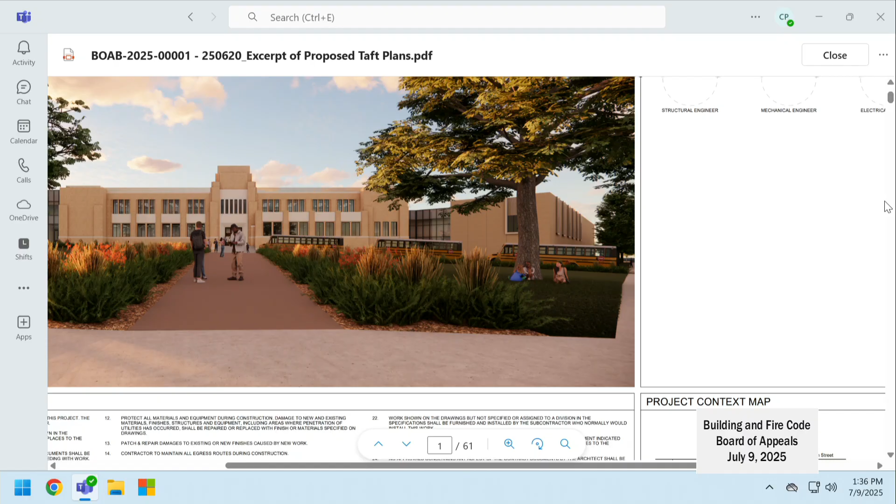So to kick things off, context on the Oklahoma City Public Schools bond. Back in November of 2022, there was a bond vote for $955 million in bond funds that would be used to improve or add to the facility capacity for Oklahoma City Public Schools. Of these, there were 14 signature projects, Taft Middle School being one. At that time, we had several public presentations which included the overall design of Taft Middle School, as well as the phasing or sequencing of the project that would help keep students active and educated on campus throughout the duration of construction.

We are in that process looking to modify the existing school building, which of course, built in 1931, does not have an ICC 500 compliant shelter on campus. But what we're looking to accomplish in the end is to provide a shelter that serves not just the Taft student population of today, but also the kind of maximum capacity staff and student population into the future of the campus.

During construction, as Scott mentioned, there is a handover period where, because of some of the sequencing, we have basically a period of one school year where there will be a new academic wing open that accommodates just the 7th and 8th grade students attending Taft Middle School today, down from the 6th, 7th, and 8th grade students who were on campus before construction. Those students will continue to shelter in the best available area of refuge, which is interior corridors and a basement that are existing as part of the campus or the original Taft Middle School structure, until the completion of Phase 2, which introduces the ICC 500 compliant shelter capable of housing 2,000 students and staff.

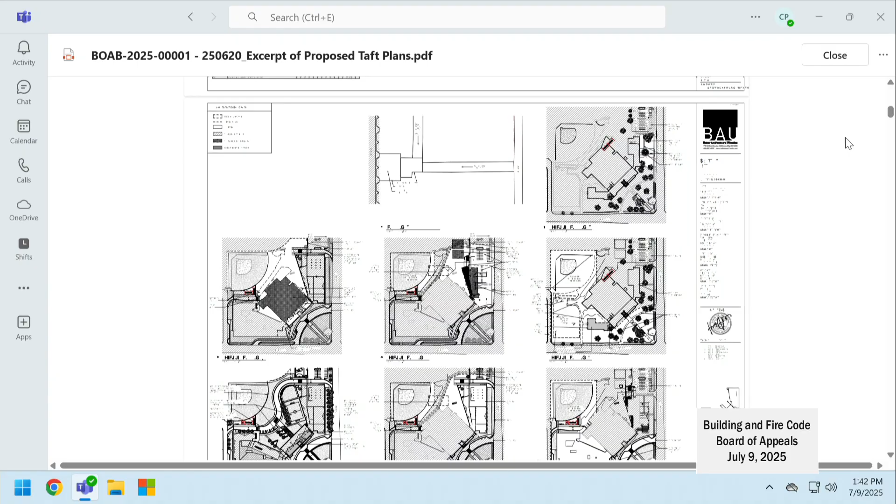Yes, that's correct. Go ahead and tell us about the phasing. So the phasing diagram's on screen, and there were additionally some renderings included with our application packet, showing the development of the site. I think if you scroll up, something's happened to our text here. In the upper right image is basically the campus as it exists today.

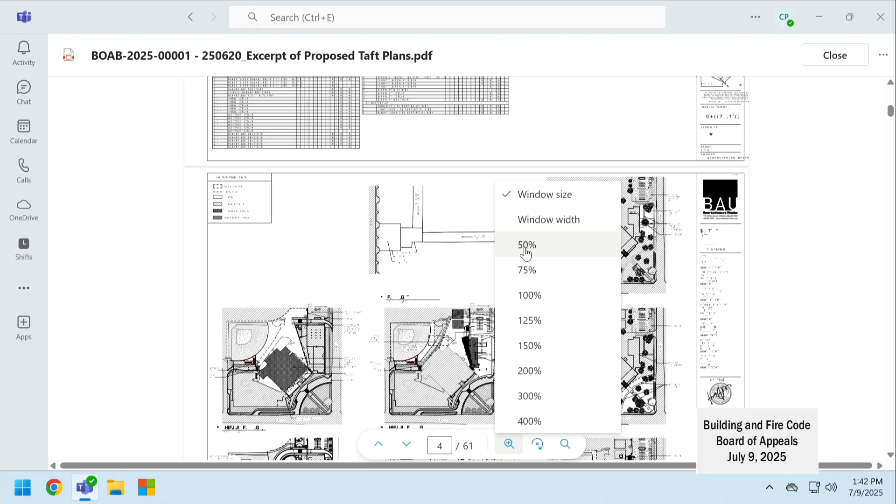That plan is the campus as it exists today, the existing Taft Middle School building. You can see a wing there extending to - and for orientation purposes, up is north on this drawing. To the west, we have a small wing that housed a total of 10 classrooms, not too many other functions housed in that wing. Then you have the central main body of the school, primarily single story with a 2-story front that houses their gym, auditorium, some other sports-related functions, some electives, a few classrooms. And then you have the north wing, which houses the bulk of the classroom facilities on campus, as well as the cafeteria and kitchen for the existing Taft Middle School students.

So really what we started with, our first phase looked at demolition of that west wing, so interrupting as few classrooms as possible and no core functions that couldn't be immediately replaced by moving students to another campus.

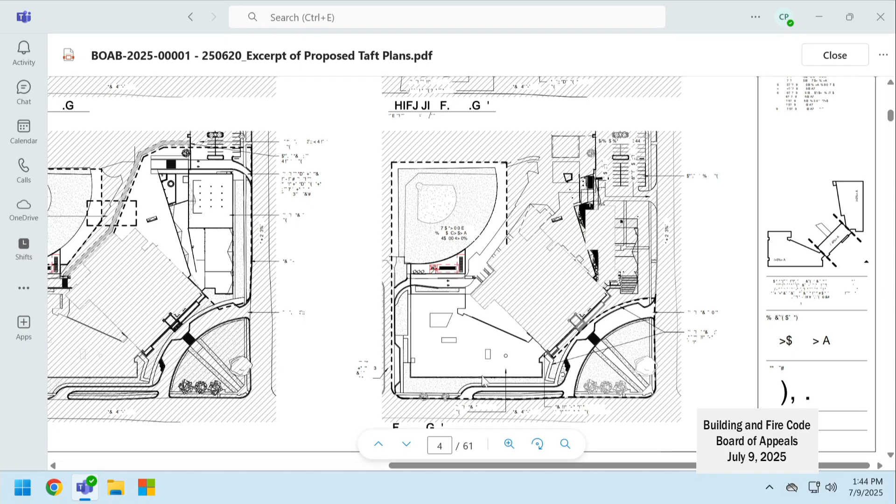We have the new proposed west wing, a much larger west wing with the intent that we provide both a cafeteria and kitchen, as well as the majority of the new classroom functions for Taft Middle School. I believe there are 36 new classrooms in just this wing alone, along with the kitchen and cafeteria, with the intent that we replace the 10 we tore down in phase one demolition.

Scrolling back up and to the left a little, we see phase two demolition takes that north wing. So again, we've lost 50% of what were existing classrooms, as well as the cafeteria and kitchen.

The plan just below shows the addition of a new north wing. That new north wing provides our ICC 500 shelter, which is the competition gym function for students. Just a portion of this wing is the actual shelter - it's the rectangle in the northeast corner of the new addition.

There are also functions like the new auditorium, a wrestling room, and a few other tributary functions that are part of Phase 2. Moving up and to the left, we see Phase 3 demolition, which takes the remainder of the back portion of that building, so the gym and auditorium just replaced in Phase 2 come down.

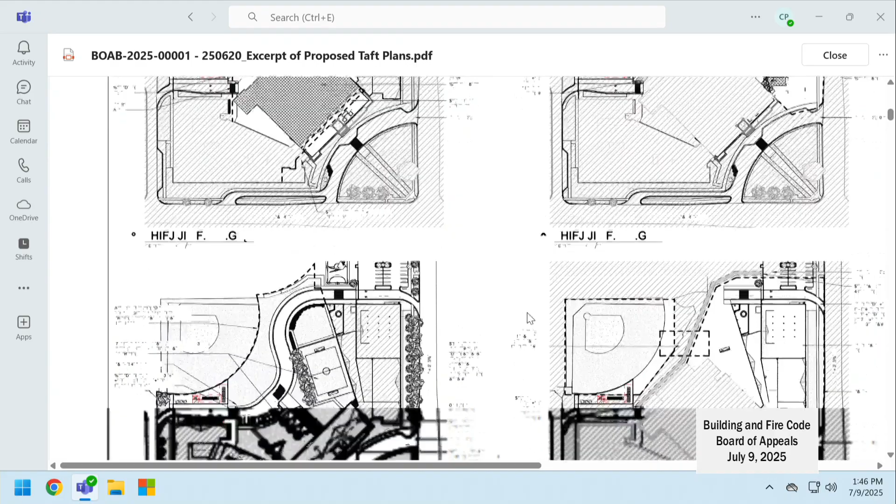Just below that we see a minor addition to the back of that existing building, so we can retain that historic public face facing the intersection of Northwest 23rd and May, and then provide those final classroom functions serving things like electives, arts, languages, and other special functions as our final move in Phase 3.

At this point, at the end of the project, 6th through 8th grade students would be able to be housed on one campus instead of also having the Linwood campus operational. So the intent would be that with that new shelter and new capacity open, we'd be able to consolidate all students back to the Taft proper campus.

Question: In Phase 1, where are your best available areas of refuge located? The best available areas of refuge remain in the existing building.

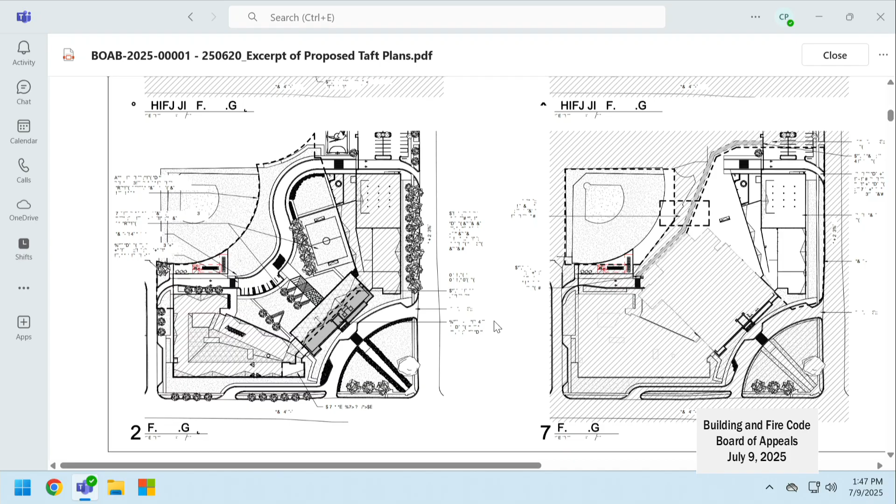Yeah, I think there's a PDF with an excerpt of existing Taft plans instead of the excerpt of proposed. Yeah, that existing file is perfect, thank you.

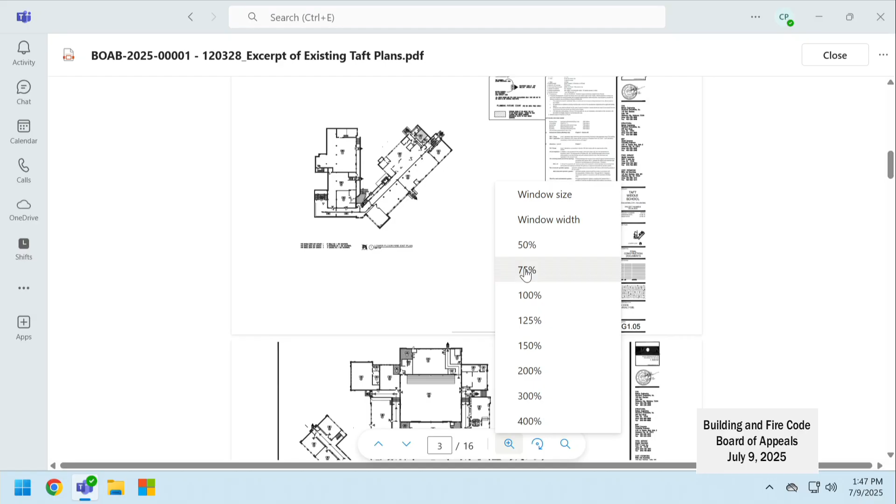So if we scroll down, these first couple pages should be good to illustrate this. This first plan is a partial lower level that exists on site. There's quite a bit of fall in the grade as we move from west to east, so that's where this partial lower floor plan comes in.

How close to the construction is it? This is directly adjoining the construction. The two are disconnected from one another at the moment for purposes of sealing off the school during construction. They will connect to the corridors of the existing building once Phase 1 is complete.

Scrolling down to the next sheet, here the plan has been rotated, so apologies for the orientation, motion sickness here. On the left side of the drawing is what was the west wing that comes down in the first phase of demolition. That west wing is where our new academic wing would tie into the existing and give access to those interior corridors, and then access as well via the stairs in the existing building down to the basement.

Okay, the basement - are you using the basement as your best available area of refuge? That is currently what the school uses as part of their best available area of refuge. The other part is made up by interior corridors on the ground floor, which is the upper plan on this sheet.

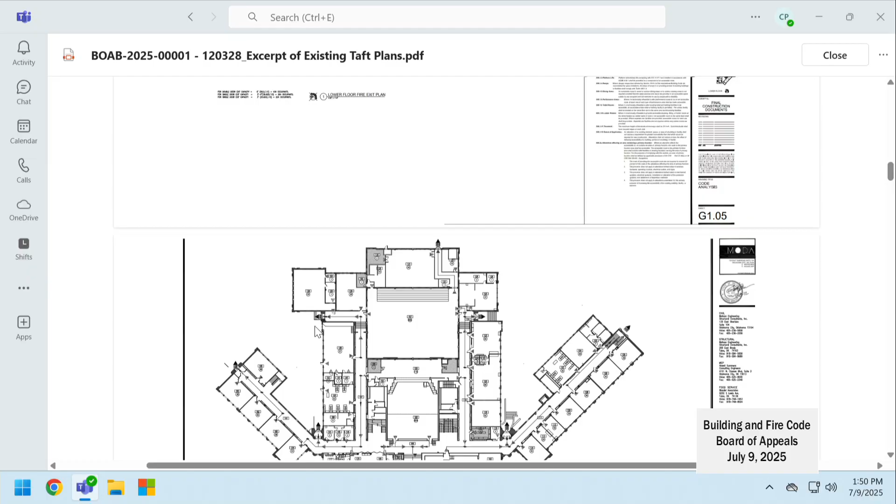Which one, where is the lower level fire exit plan? Next page above, yeah, that'll be our basement plan. Well, that's below, that is below street level. It is below grade on the left portion of this drawing. As you move to the right side of the sheet, we get closer and closer to the elevation of, like, May Ave. So it is down below grade by about 2 feet, but there are window sills at maybe chest height in the cafeteria space that look out towards May Avenue.

So I want to state for the board here as well, for the interim occupant load of 541 students, you said, right? Yes. The required square footage for shelter would come out to roughly 2,750 square feet. That sounds about right.

On your applicant statement you identify the 3 construction phases. The phase 2 identifies when you're going to put that storm shelter in, right? Yes, ma'am. So part of the package that we were given were the letter exchanges to the city back and forth. And in your letter you had mentioned there was a meeting on February 14th to discuss - was that when you guys discussed the phasing to try and see if everybody was on the same page? Kind of describe what happened at that meeting.

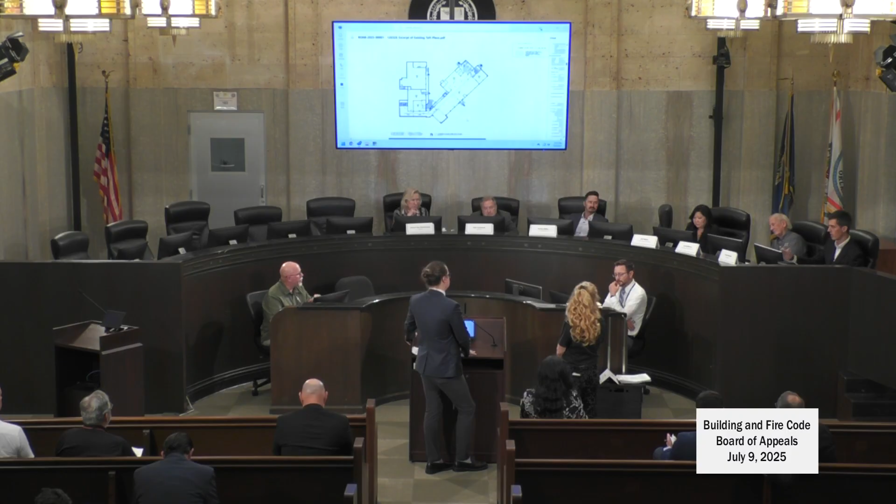How much hardened area, you mentioned some area of refuge, was proposed with phase 1? I understand it's not ICC 500, but do you have an approximation or a graphic that could show those portions? Yeah, we could provide one. I don't have that figure offhand, but it's a similar setup to the main body of this school where there are some exterior classrooms with windows for daylight and views and what have you. But the interior corridor spaces and things like restrooms could be used, yes.

I'm confused a little bit, I apologize, I want to back up to the basement area. Is that basement still utilized? It was. I was a student there, and I think they called it the Sooner Room or something, and it was a meeting place in the morning, a social place. Am I correct with that?

Does anybody else go to Taft? Just me?

Yeah, that area right there, yes, we do have classrooms right there. We had renovated through the years and also through the MAPS process. There was a big MAPS renovation at Taft as well a couple of years ago. So that area, those are regular instruction classrooms just outside that cafeteria area. It looks very different than probably way back then.

I'm confused why that would not be where you would want students to be for the tornado instead of a hallway that never works. Well, it's part of that area. So part of that area you're mentioning, it is what is included. What he mentioned that is excluded is kind of the cafeteria side, because that part is going to be demoed with phase 2. But the area that you're talking about, that dark basement, I understand that. We have renovated it and that is still available and it's going to be available through the whole construction.

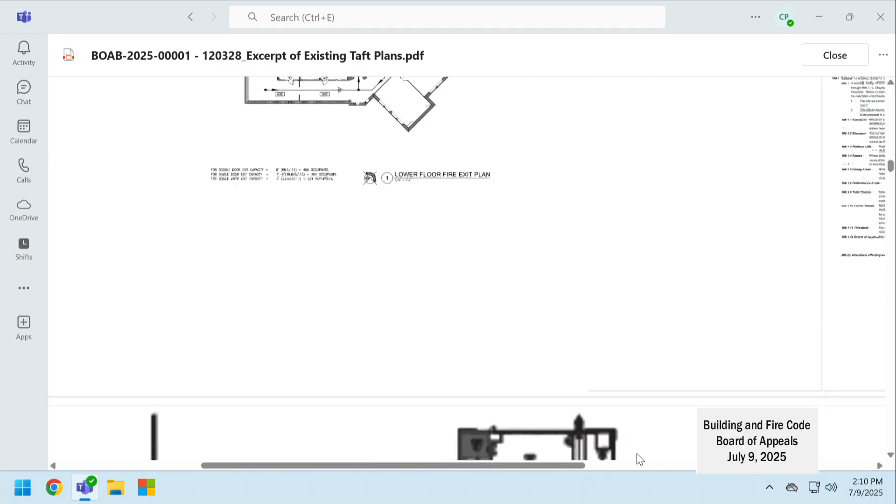I think the main reason for using that upper hallway as area of refuge space historically has been that additional grade of students that had been on site. So this was a 6th, 7th, and 8th grade campus pre-construction. So I think just capacity in the basement may not have been sufficient for 840 students, but it's something that could work for 2 grades.

Is there still a swimming pool there? No swimming pool.

Do they still make cinnamon rolls in the morning? No, I'm just kidding, I can't attest to the cinnamon rolls. Hey, you all don't know, you didn't go to school there. I'm trying to help you. Sounds like we should have.

So the roof structure of the Phase 3 portion, that's going to be demolished, behind the historic section. If you'll scroll down a little bit, Scott, that rectangle is going to remain, the entire rectangle, right? Yeah, just the corridor and everything planned south of that, the corridor, yes.

When you look at the plan just above that, the first floor plan, there's a basement under there, and that floor covers the entire basement area we've been talking about as refuge. If you see those stairs on the right side, those are the stairs that take you to the basement, just for context on size and scale of what that basement area actually is.

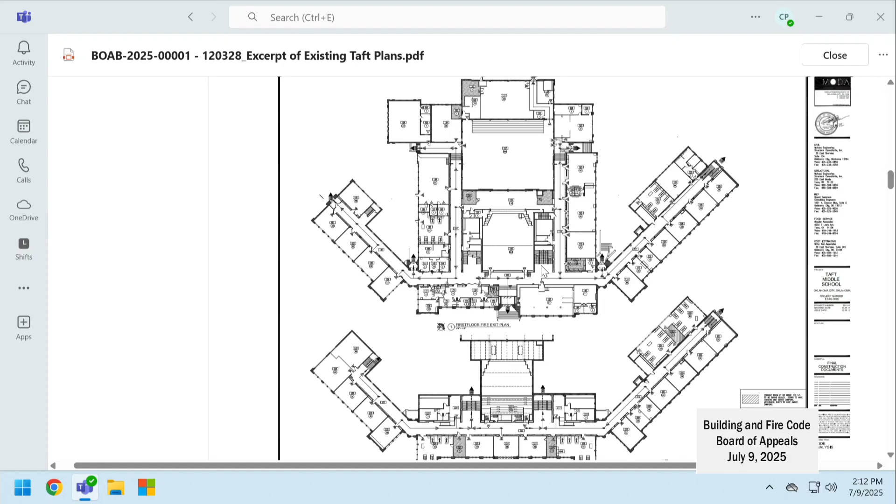So if you go back down to the basement plan, please. So that stair on the left side there is really the stair you were just pointing to on the right? That's correct. Okay.

So again, above rooms 02, 04, and 06, there's not only a first floor structure plus a roof. I believe over top of 02, there's the main floor structure and a second floor. By the time we get to room 04, past the grid lines, there's basically a third story, but at least another floor and a roof. That is correct, at least one more floor.

So 06, since it's a boiler room, is it going to be operational during the renovations? Yes, it is operational through the end of Phase 2, or there's a handoff period over a summer where that room 06 is demolished as phases 1 and 2 have been completed.

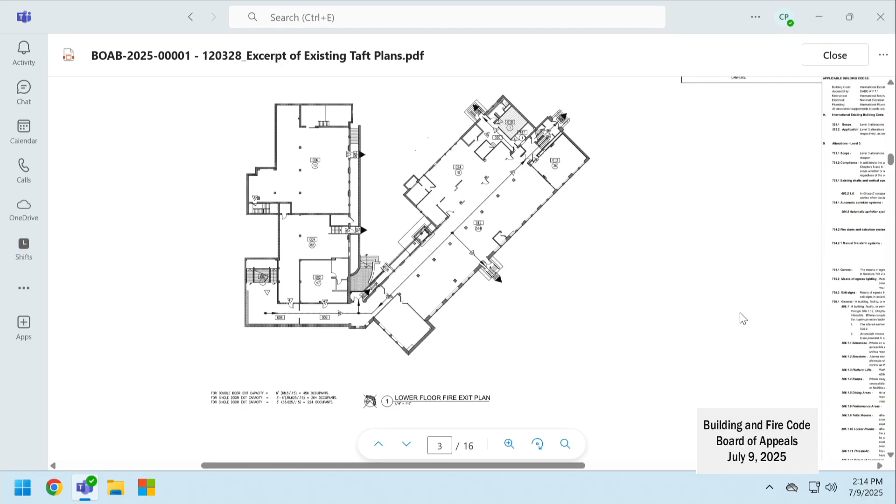So essentially what you're asking is whether in the interim period, for the two seasons where we might have severe weather, this area, 04 and 02, the two quarters, can substitute or continue being used historically as the best area of safe refuge for students occupying Phase 1, because Phase 2 or the wing on the right is going to be demolished as soon as Phase 1 is done. So you're asking if we can continue to use the historic area for the new construction until the new ICC 500 structure is built, which we think, give us a timeline, 2 years?

Yeah, so if helpful, I included the timeline we discussed in our pre-construction meetings in the applicant statement. So what we're looking at is through August of 2026, this coming school year, we'll still be constructing Phase 1. The year after that, we construct Phase 2, and it opens in August of '27.

That we allow the existing use to continue, the existing approach for sheltering in place during a storm, to continue. And during that period, there will be a reduction in students by about 300. Yes, that's what we expect based on enrollment numbers today. We can't commit to an exact figure given students held back or transferring, but the current figure for rising 7th and 8th graders is 541 students.

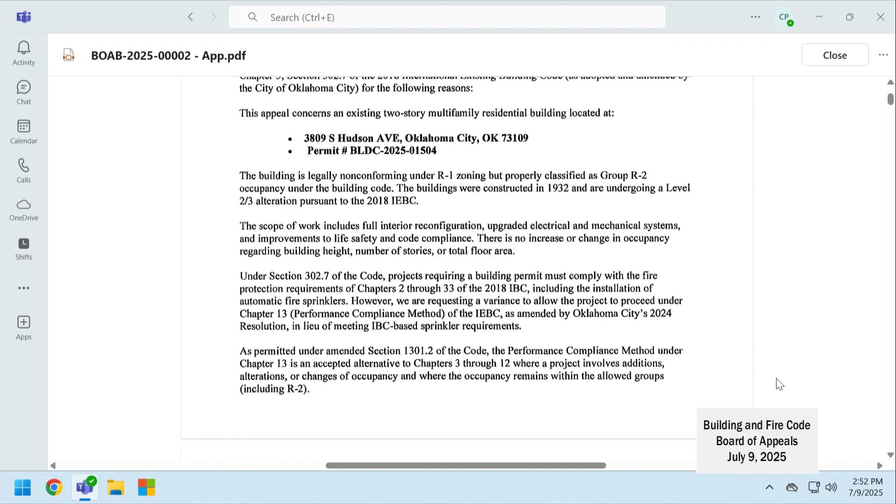It's an amendment created by Oklahoma City years ago. I can't tell you how long. I think Mike may know, but it more or less requires that any time a building permit is pulled, that portion of the structure must be brought into compliance with the IBC for fire suppression and fire protection systems, as if it were new—at least that fire area, is kind of how we've defined it. So that is the gist of this problem.

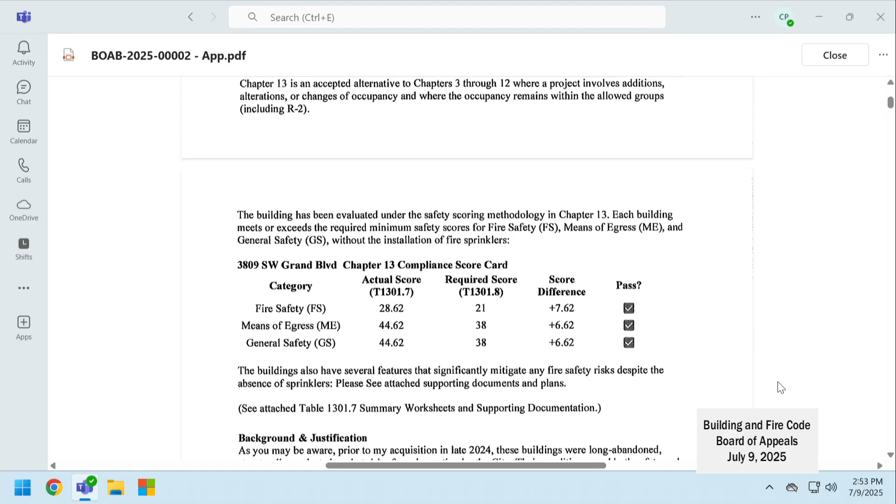I think the applicant—you're here contesting against the requirement for fire suppression. Yes, yeah, so that is where we're at. Okay, I see the applicants at the podium. Would you state your name and give us your address for the record, please?

Yes, Trey Maston, and the address for the... Your business address? It's 4616 Northwest 59th Street, Oklahoma City, Oklahoma. You want to tell us a little bit about your projects?

Yes, so board members, fire marshal, city staff, thank you for your time today. My name's Trey Maston, I'm the owner of the 3 Ward 4 properties under review today. Each was previously slated for demolition and is now being rebuilt for families. These buildings were a nuisance for years with repeated violations and safety concerns. I took them on to restore them responsibly. The work is fully permitted, privately funded, and carried out by licensed professionals in coordination with city staff.

We are here today requesting a continued use of the Chapter 13 performance compliance method. This method is made under Section 1301.2 of the IEBC, which allows the use of Chapter 13 as an alternative to prescriptive code compliance. We're asking the board today to approve the scoring path that has been put in front of them as an equivalent. The technical scoring and code compliance details will be addressed by the representatives that I have with me today.

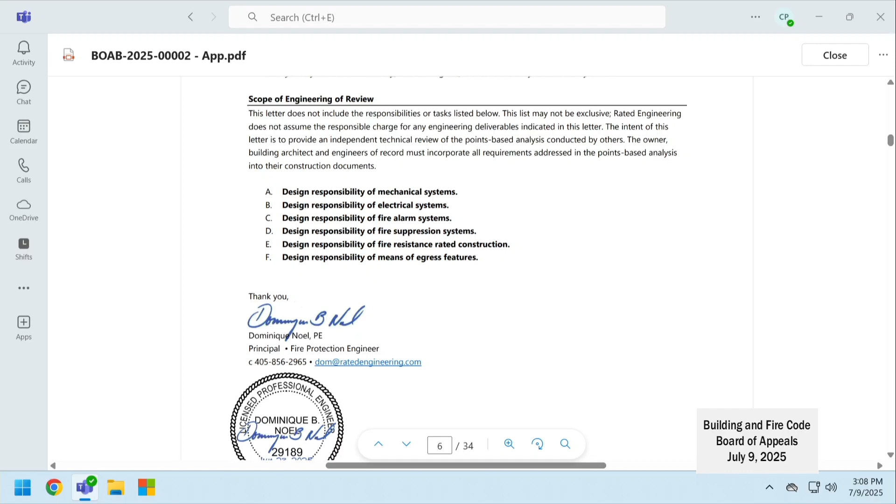But I'd like to turn your attention from there to page 6, which the city adopted the performance compliance methods under Chapter 13. Specifically, the applicability of Chapter 13, down at the bottom of page 6: 1301.2 is amended to read as follows. Applicability: existing buildings in which there is work involving additions, alterations, or changes of occupancy shall be made to conform to the requirements of this chapter, Chapter 13, or the provisions of Chapter 3 through 12.

And when we talk about Chapter 3, that's 302.7. So you can comply with either Chapter 3 through 12 or Chapter 13. If we go through the IEBC Chapter 13, it's a scoring-based system where there are plus and minuses, and you have to get to a minimum score in order to pass under this alternative method. If you take the interpretation that we're talking about exists, that completely does away with Chapter 13. It makes it superfluous, it would never work, because you couldn't, there's plus and minuses. So if you don't meet one of the requirements, you could never get the score. There's just no reason to have it.

And so by the city's own adoption of this code, it's not just 302, it's Chapter 3 or Chapter 13. Especially when you're dealing with a building of this size, 600 square feet, outside egress, and I'm by no means deferring to others in the room on fire safety, but it seems specifically designed for this type of alternative scoring system. Does it meet the minimum safety requirements even though it doesn't check the fire sprinkler box?